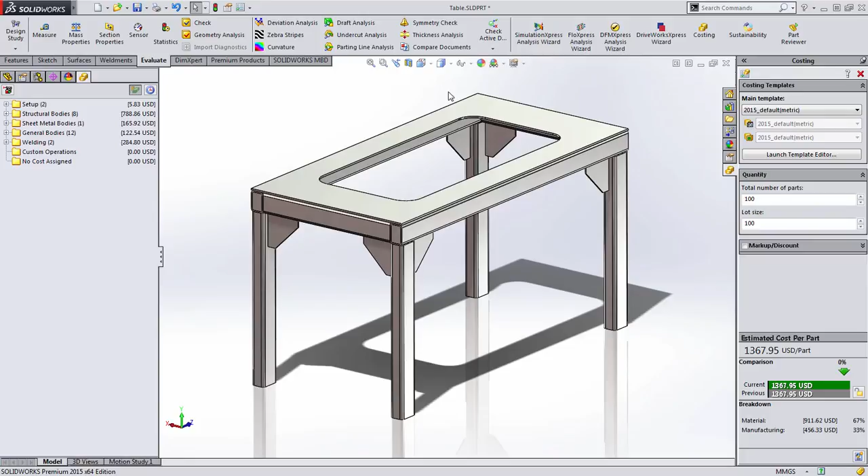Costing 2015 introduced some great enhancements to support a much wider range of manufacturing methods. The first new method supported is for weldments. In this structure, we have both sheet metal and weldment components. When we launch costing, we now have additional categories for the types of bodies supported.

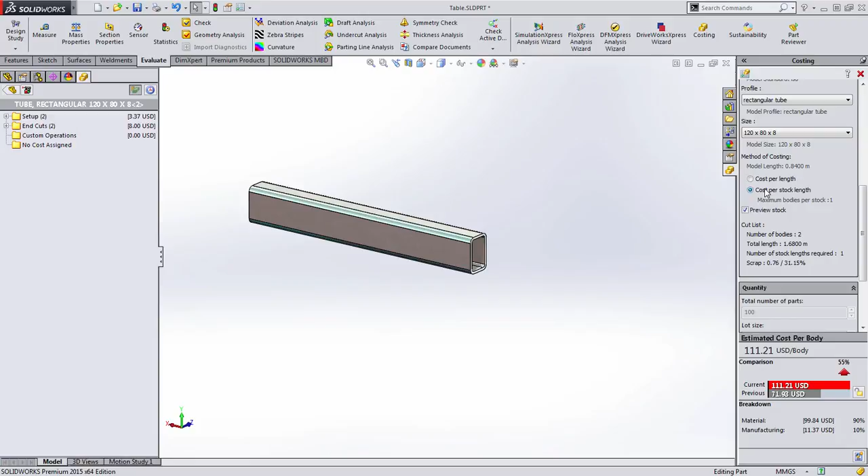What's really powerful about this is that the weldments can be costed based on either an available stock length or on a per unit length cost method. This can greatly help in minimizing wastage of materials based on the lengths needed for the design. The costs update immediately to reflect the change in the method. Any manufacturing or machining operations such as trims, cutouts or holes on the weldments are accounted for as well.

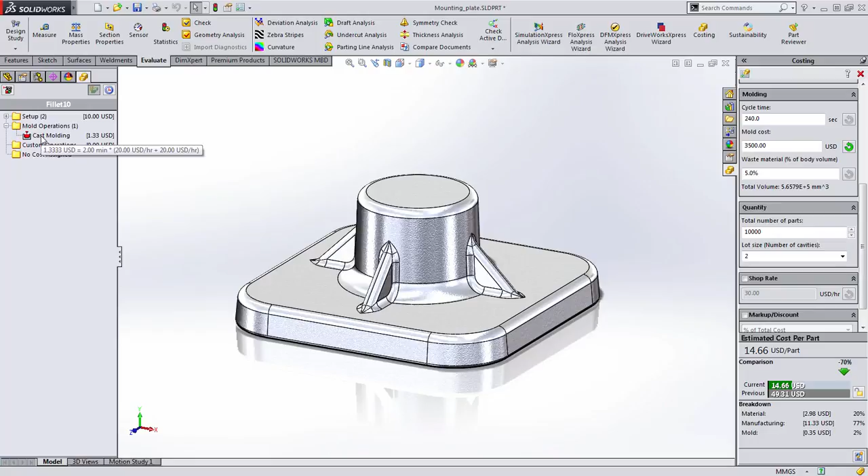Metal cast components are now supported in 2015 with the new ability to account for aspects such as mold cost, cycle time, and the amount of waste material as part of the manufacturing process. You can easily evaluate the product cost change with production volume for distributing costs such as the mold over the entire production run. This helps in being able to consolidate all of your manufacturing cost items within the SolidWorks environment.

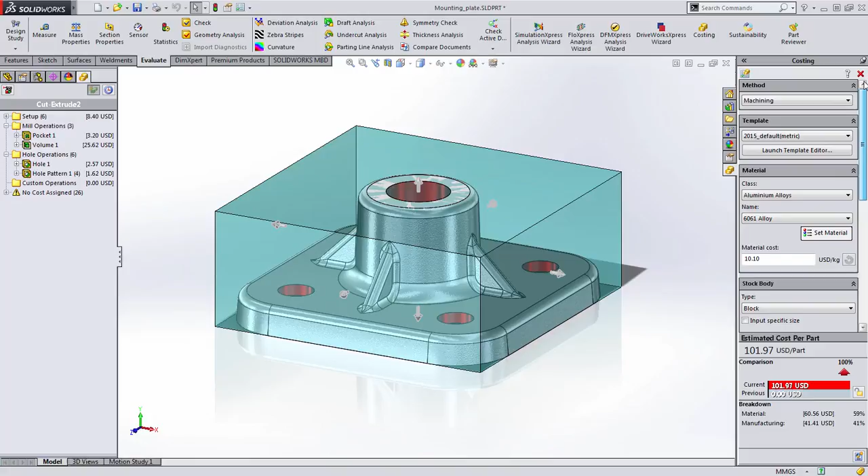A very important update comes when trying to account for machining operations applied to cast components. You're now able to specify a stock body for the machining instead of using the default block shape, and then use either a configuration within the part or an external file to define the cast shape. If costing information is stored with a stock body, it is used as the base cost, and any machining operations are applied on top of that. So you have a far more accurate cost analysis for cast and machine components in 2015.

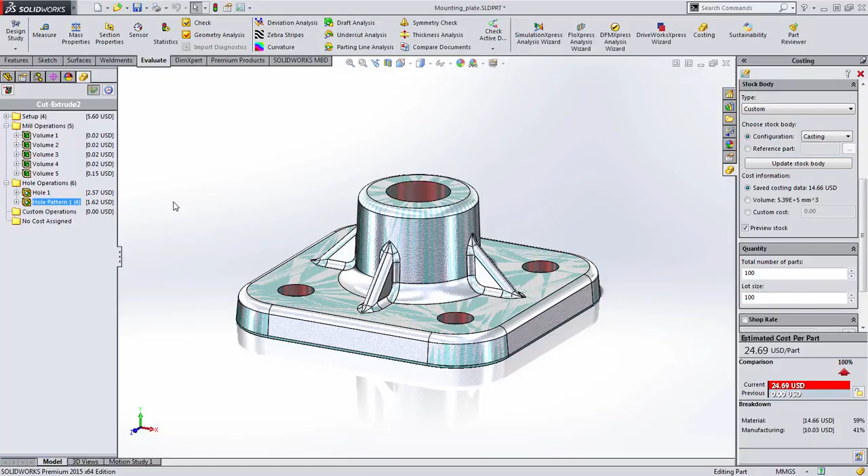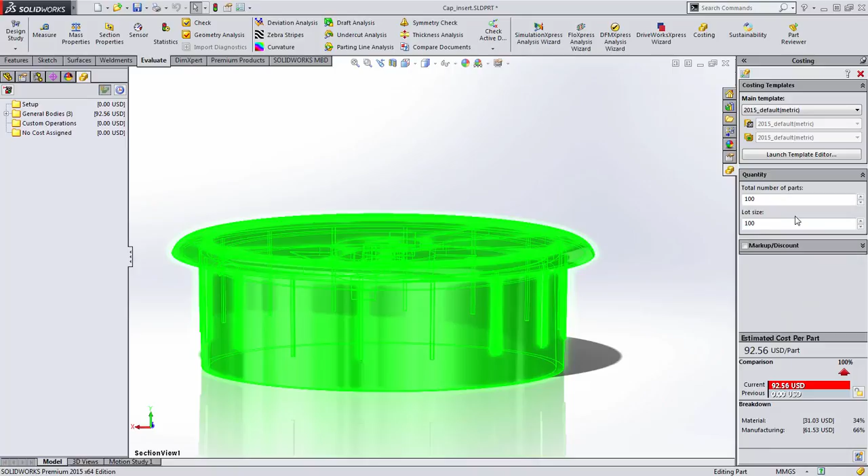Plastic components are also supported in SolidWorks Costing 2015. 3D printed parts can be costed using the 3D printer data stored in the templates. In this example of a desk cable organizer, SolidWorks Costing goes through and calculates the 3D printing cost for each part individually. The template provides several settings to tailor the cost for specific 3D printers.

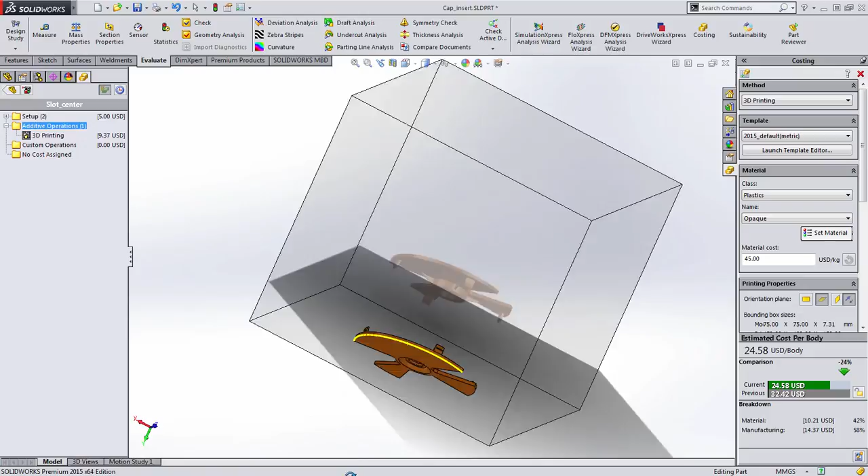Looking at just the slot center part, we can see the 3D printing options. The part can be oriented in the 3D printing volume using a plane selection to ensure the most efficient printing. The amount of infill that is done during printing can also be evaluated to look at the impact on print time and cost.

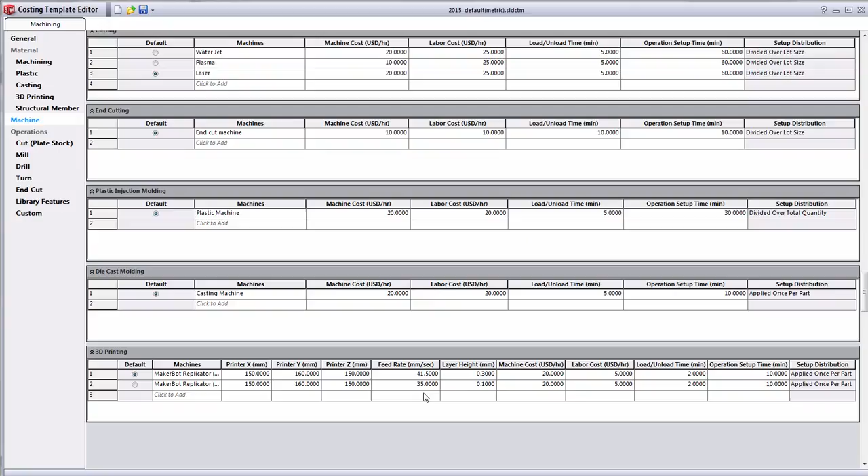You're able to toggle between different 3D printers or different printer configurations to evaluate not only the print time, but cost associated with generating the parts. All of this is rolled up for the multi-body part to account for the costing of all of the components. The templates are fully customizable for adding and specifying the different options on the 3D printers. In this case, you can see the difference between the speeds and layer heights for the different resolutions.

Similar to the support for cast metal components, plastic injected parts are also supported. Aspects such as the runner system, cycle time, mold cost, and waste material are accounted for. So in Costing 2015, it's very easy now to get a handle on manufacturing costs up front and get a greater understanding of how changes impact costs across all your manufacturing methods.